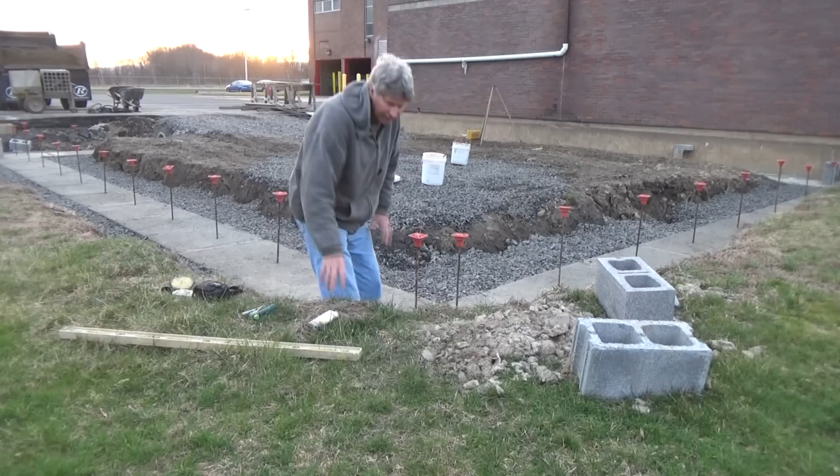Today we're going to square up this building. Just because that building's there doesn't mean it's square. So I'm going to show you the old school way that I learned to square a building. I use it all the time. I double check myself, and I got lucky. I never made a mistake.

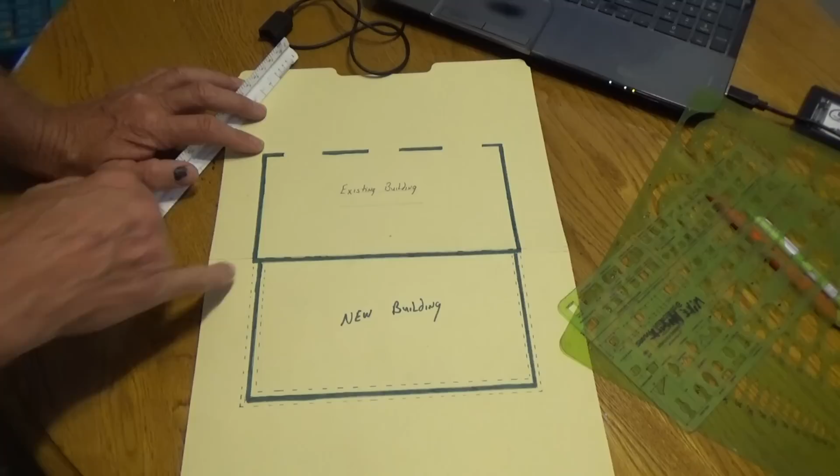Now the first thing we're going to do is look what's going on. This part right here is the existing building. This is going to be the new building. So anytime I add a new building on, I always recommend to go back 4 inches. That way if any building's out of square, it's not going to show, and it's just a structural thing that makes it look a lot better.

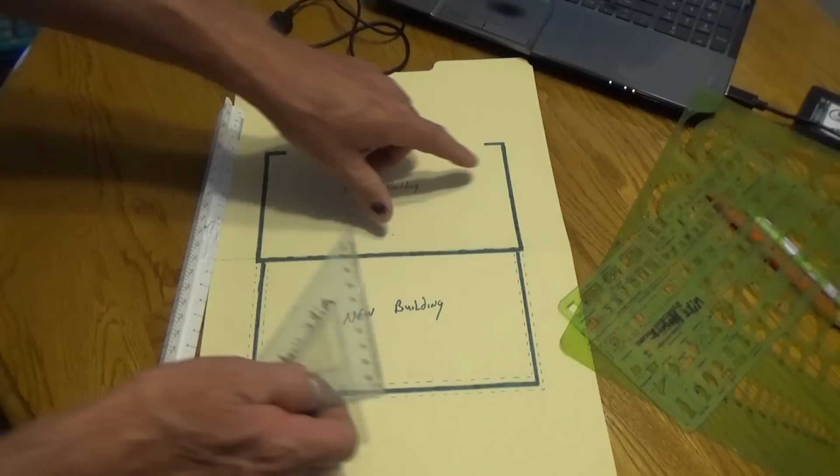But a lot of guys, when they're squaring the buildings, they'll run a line down this way, run a line down this way, but you don't know if this building is square. So you got to square off of this part of the building right here, because when they come with their trusses and they lay them across these two walls, these have to match. And then what you're doing is you're squaring these two walls, and the building could go this way or this way. That's how you square it.

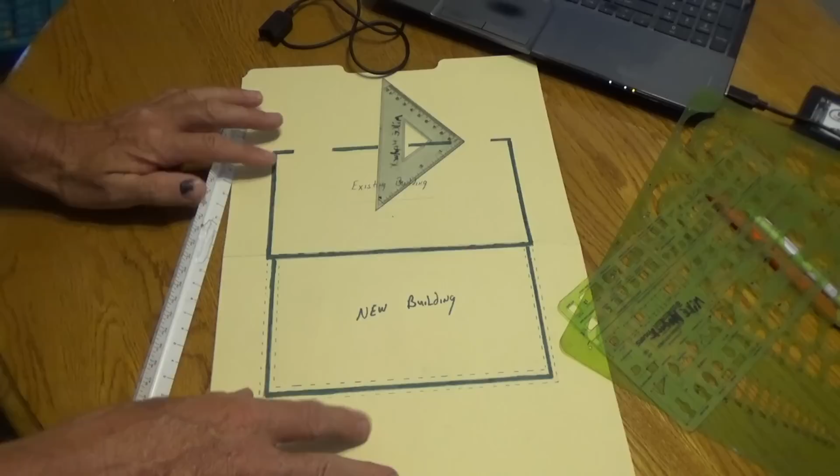So the first thing we're going to square is the footer. I'm going to show you how I do that. This is an architecture square right here for drawing, but I use a piece of plywood. Basically the same thing. So let's go piece by piece and I'll explain it.

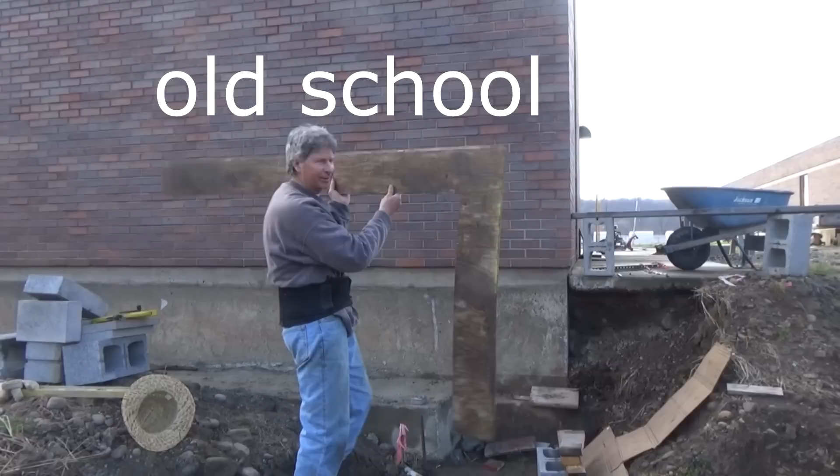Well, today we're going to talk about squaring off a building. Now, there's a lot of guys out there who do it a lot of different ways. I do it my own way. I learned from the old timers how to do it. And there's a fast way that I do it, and I'm going to show you how I do it. Little trick. First thing, I get myself a piece of plywood like this, and I cut it into a square.

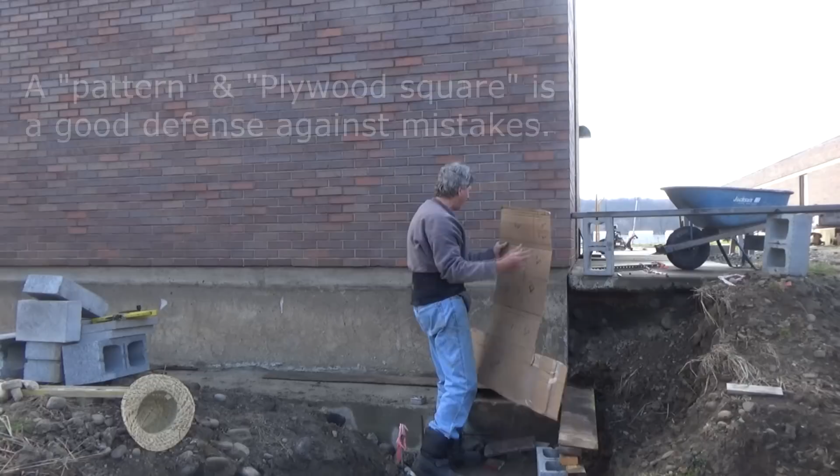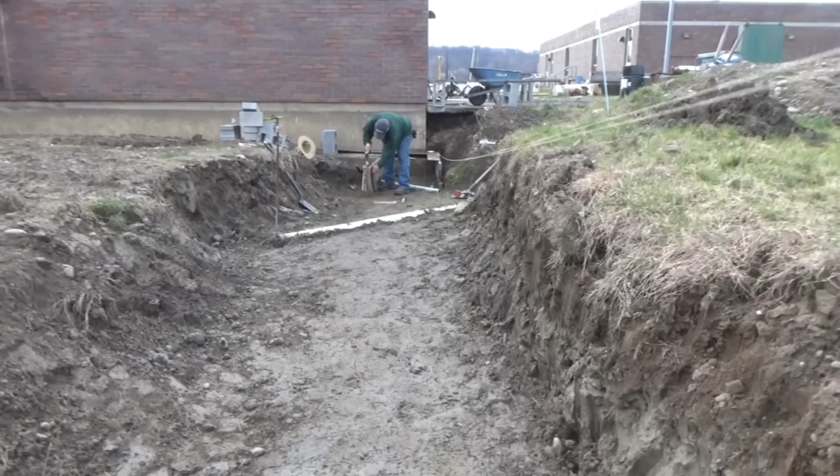And then I take it, and I put it right up against the building. Just like that. And I know, when I make my pattern, that it's going to come over here, and that's where my footer's going to be, because right now we're squaring off the footer. So once I get it where I got it, I got the line right here, and I'm going to go right even with that square. And as I go even with that square, that's going to show me where this footer's going to go.

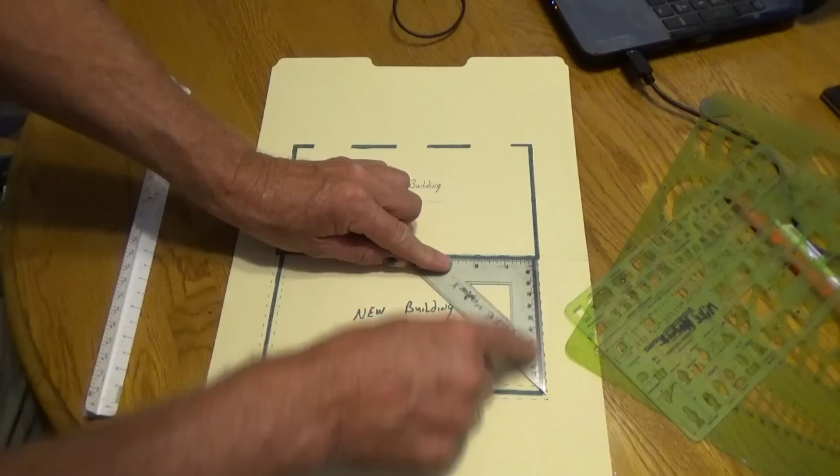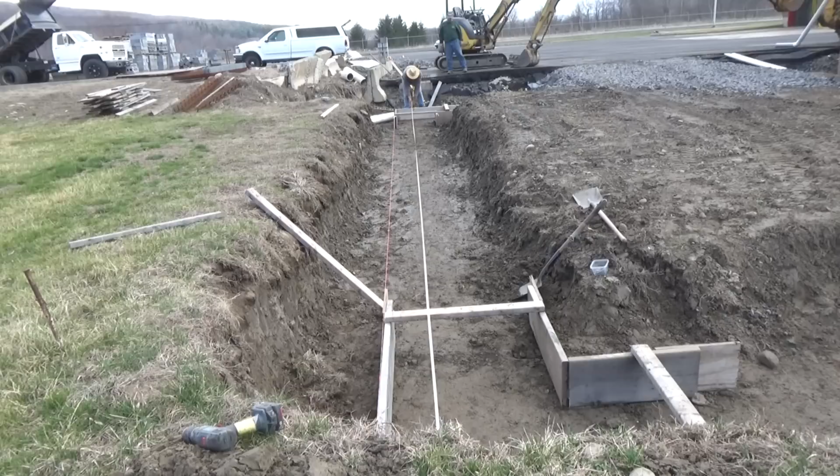So what I basically did was I took my square right against this wall, and I got a general idea where that string is going to go for my footer. That's going to give me a starting point. And then I'm going to measure from here to there and from here to there. I'm measuring from that wall to this wall to get this footer right. Measure it this way, and measure it that way, and then we catty corner it.

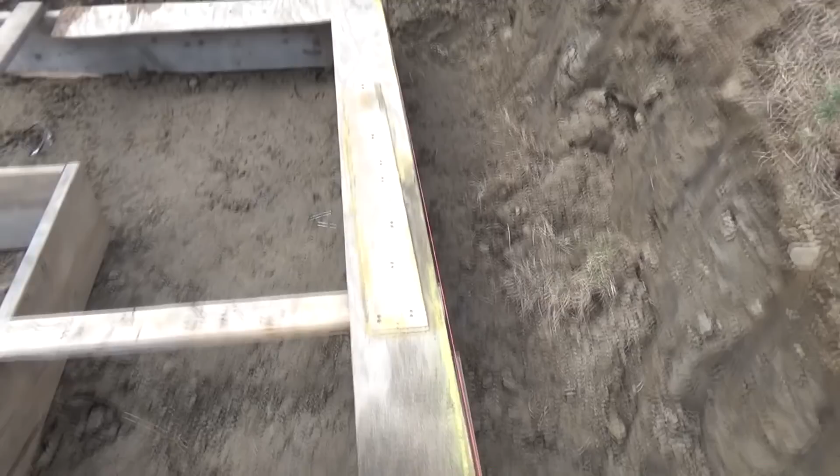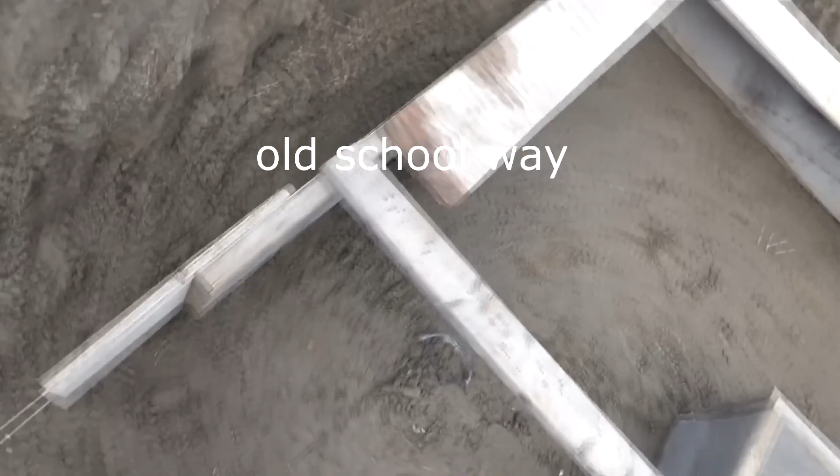Now see, I put my square in the corner here, and I check my line, and I go over here, and I check my line. That's going to put me 99% of where I'm going to be, and then when I catty corner it, should be damn close. Now what I did was I had my point, and I measured over here to make sure I was right this way. And then I came back here with my square, and I put my line this way and this way to make sure I was good.

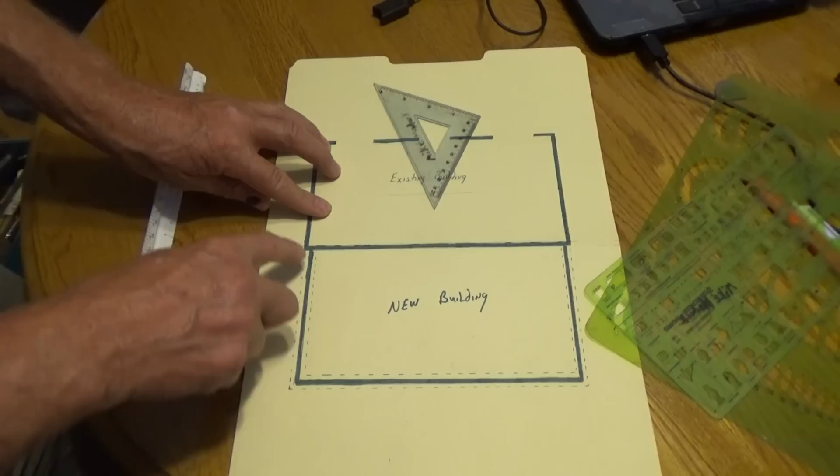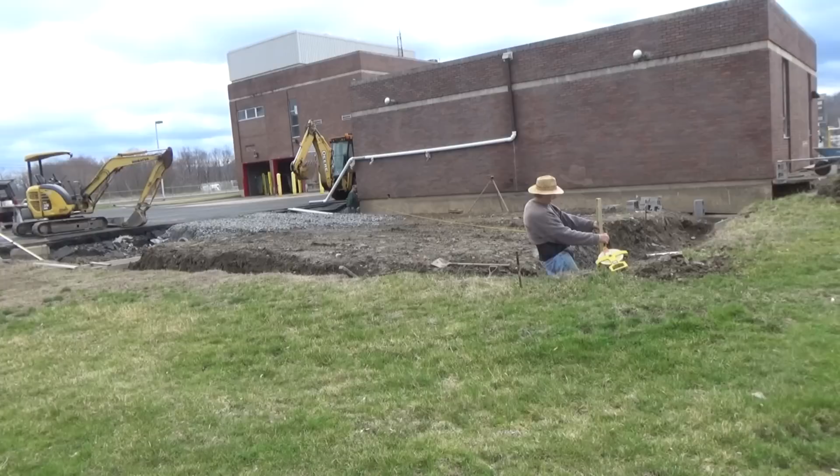And now what I'm doing is I'm measuring from this point to this point, just like this. And then from this point to this point, just like this. And those 2 points, they got to match up. If they don't match up, say this is 10 feet 1 and this is 9 feet 11, well, that means this is too long and that's too short. You got to keep moving it back and forth until you're exact. I got 58.7.

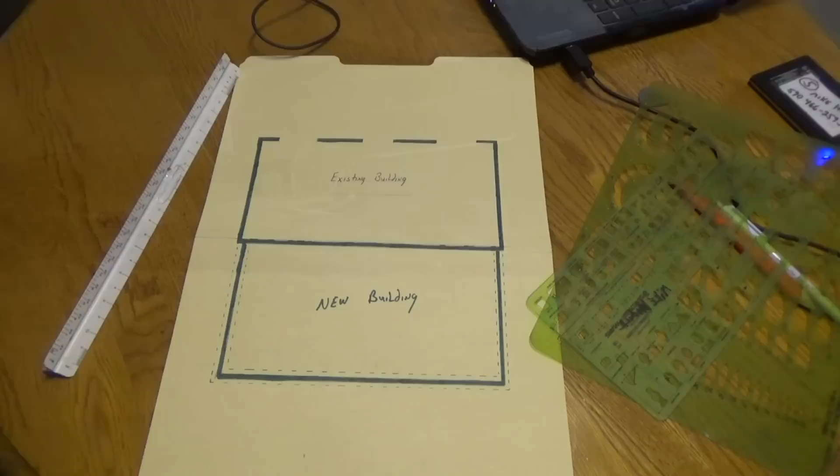Now we have our footer in, and it's all squared up with the building, exactly as it's supposed to be. Now we're going to do the same exact thing with the block work, and a couple tricks that the old timers showed me that I use when I lay my block out.

Now I took a measurement from that building this way, from this building this way. This is a basic idea. I'm going to run a line here because I'm not going square with this side of the building. I'm going square with the flat part. Because when they put the roof on, everything has to match. So I run a line down right like that. 8 inches.

Now we're going to measure from that building. 36 foot, 36 foot 1 because of the brick overhang. So I'm going to move this line out here to 36-1. Right there. Now I'm going down the far end, same thing this way.

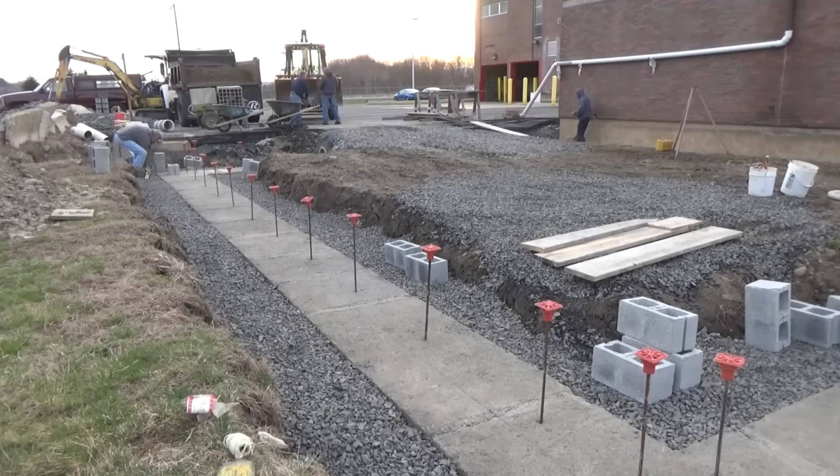Okay, I got myself a piece of plywood square. I made a square out of a piece of plywood. And it doesn't give you 100%, but when you're squaring the building off, it gives you the option to move the lines around so you become very, very close. Very, very close. And then you know when you're square.

Because when they get on the top of the building and they put the plywood across and it ain't matching up, they're going to know right away that you're not square. So right there, that's telling me that I'm pretty good. And then I'm going to measure the other side, and then we're going to go catty corner.

Now when I get these two lines going the way where I think they should be, I'm going to put my block right there. Get it down to here. I should be pretty damn close to square. Just like that. I go from that block.

Robin said the lasers don't work. They're building billions of dollar buildings, but they don't know.

Okay, 44 foot 8. Now we're measuring this way, catty corner, 57.4. Okay, I'm at 57 and a half. I'm long, so I gotta move the building that way. So this side is short, that side is long, so I gotta move the building this way a little bit. That's it, we're square now.

Now, after I squared it off, I just put the square on to make sure. You see how that line's right up, all the way down to where it's supposed to be. And then this side, the blue line, whatever color that is, see it right there, that line's right up too. That's a little neat trick, especially when you're down in a hole. So I just want to pass that on.

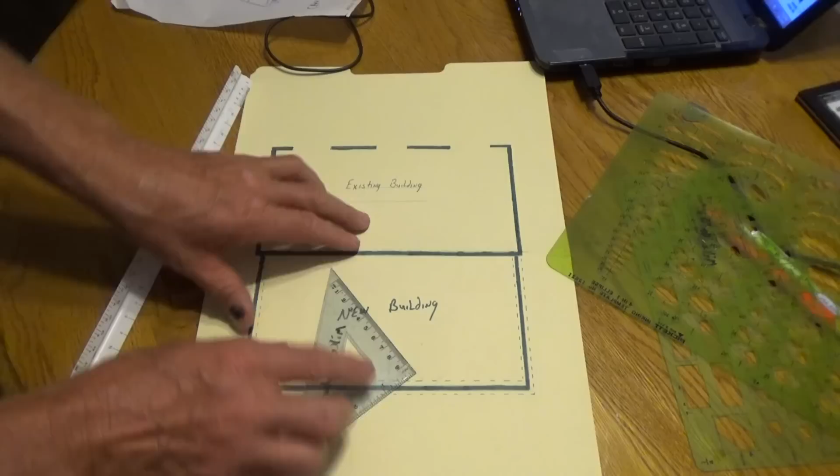That was it. That was the old school method that I still use today. And if you ever took architecture classes, you'd learn how to really do it. Other guys used different methods, but I grew up with this. It always worked for me. I can't go wrong. God bless architects and engineers, but they make mistakes too. Here's a typical example. It works on paper, but it don't work in real life.

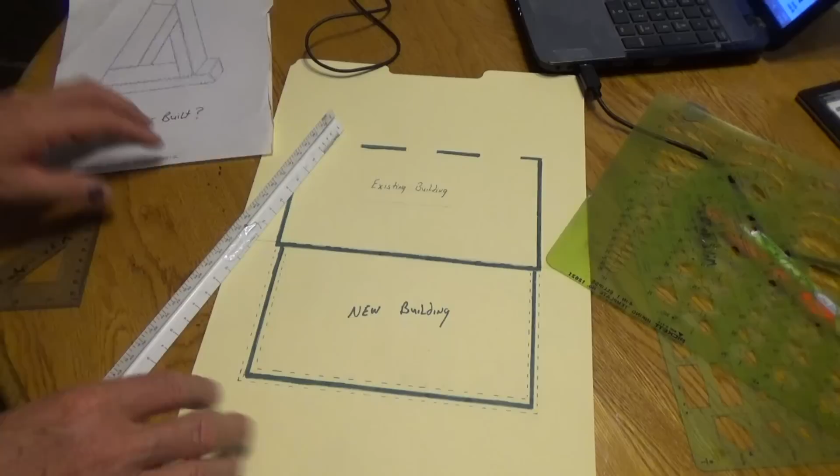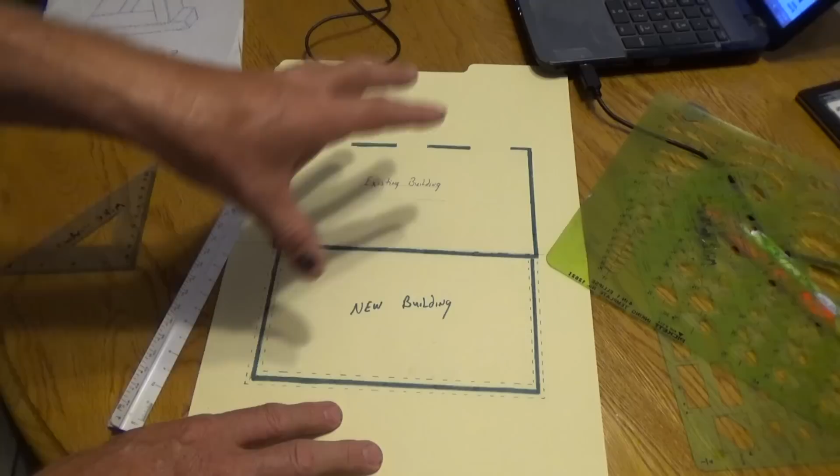And sometimes you just got to keep checking. And if there's something off, plans don't look right, you got to get the powers that be, make sure everybody's on the same page. And it's always good to have whoever else is there, the carpenter, come down and check it with you to make sure his wood's going to work, just so you know.

And here's some of my old stuff from architecture school right there. Templates. That's a jacuzzi template. Honest Mike was trying to sell them a 4-woman, 1-man jacuzzi, but they didn't go for it.

So that's it. I hope you pick something up. Like I said, old school. If your way works, use it. It doesn't matter what you use as long as it works. So that's it.